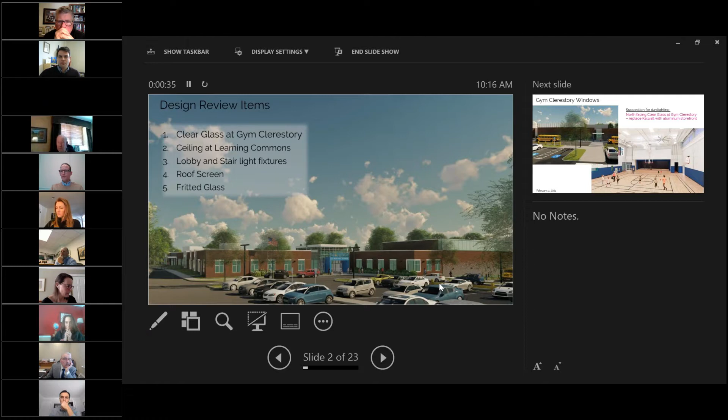Right, I hope I'm sharing the right screen. Did I press the right button, Dave? We see the presenter view for PowerPoint, so we see the actual slide and then the next slide with notes. Oh, okay, so you're seeing the wrong screen. If you can send that choice back to me again for presenting, I'll share the correct screen. Sure, hold on one second. I'm gonna click it off you first, and then I'm gonna click it back to you. Okay.

There you go, that should be correct now. Is it full screen now?

Decisions were made at our meeting last week, as Diane mentioned, and these 5 items were selected by the design review committee for us to push along in the process, get some pricing done, and give some additional design information. The first 4 items on this list were selected by the design review committee and are being further documented so that we can get pricing back. I think Dave's prepared to share a little preview of that information if we have it.

This is the images that we showed last week for the Gym clerestory windows, reminding everyone that the Kalwall designed for that area is very frosted looking, and it's a polycarbonate material that over time does get affected by UV light. So it's bright white, and it's intended to stay bright white, but if it's a 50-year building, it may not look as great later.

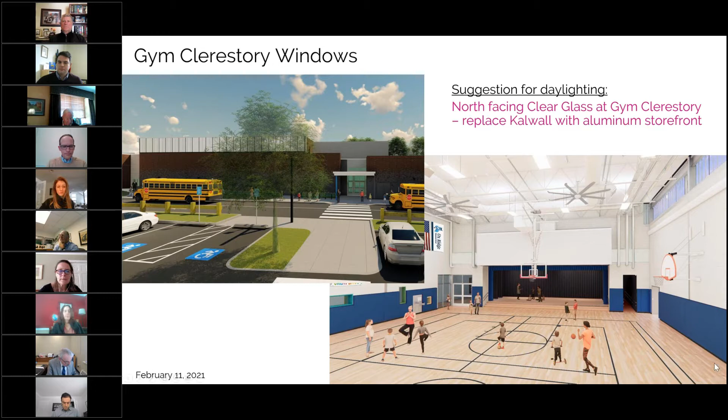The next item we looked at was a suggestion from the design team of adding some ceiling baffles to the learning commons. We have these baffles; they are an acoustic product for sound dampening, and they also have light fixtures on the underside of a few, not all of these baffles. We suggest that in the learning commons, as a design element, it would further distinguish the learning commons from the corridor by adding these ceiling baffles for both design and sound dampening. That was accepted by the design review committee and now will be priced after we send new reflected ceiling plans to the CM.

So we have some design work to replace these light fixtures, which were recessed in the ceiling, with the baffle design. We'll be looking at the light levels and making sure that's appropriate, which of these are lighted. I have another view of that that I added here, so you get an idea of what we'd be talking about.

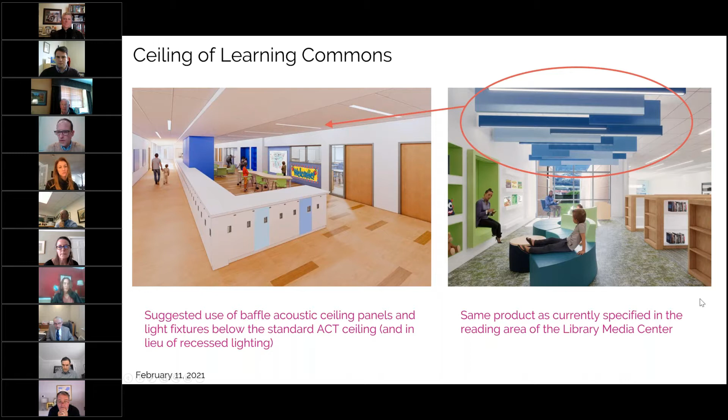Any questions? Amy, do you happen to know, or George, do those baffles require any sort of support system above, like a unistrut or anything? Are they for the most part mounted to the acoustic ceiling grid? I think they'd be mounted through the acoustic ceiling grid to the deck above, but they do not require separate unistrut.

Just thinking about it from a coordination standpoint, if we're taking recessed fixtures out of that area, my guess is we're probably in a similar situation if we go with those, unless George, you had something to add there. No, the only thing I'd add is maybe look into the fire alarm with the horns and speakers, because depending on how many you have, you might have an issue where you can't hear them.

Oh yes, so certainly the MEP engineers will take a look at that as well as sprinkler distribution. And as far as an order of magnitude, again, there are recessed fixtures that would be coming out, that would be offset.

So we don't have enough really at this point to know what this would be, and I'm not even sure of the quantity. I know the quantity we had in the estimate, which I believe represented only the media center. Right, and I think there was about 200 to 220 square feet of that material in the media center. That sounds about right.

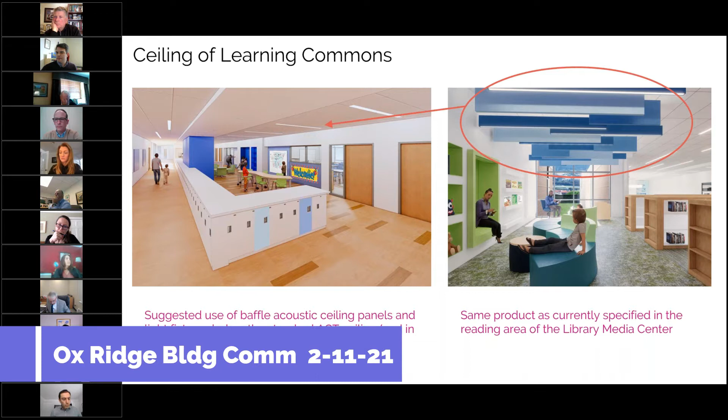This is Rusty, following up on Sean's comment - is there engineering to show us the incremental benefit of this versus the acoustical tile that we currently have?

This is additive to the acoustical tile, Rusty. I can get product data for you on the baffles to share the additional benefit, but this is just that - it's additive. The acoustic tile remains because there's still MEP systems, ductwork and piping that runs above the ceiling there, so we're not looking to expose that area.

No, I said the incremental value over the acoustical tile. So if you can get me that data, and Sean would probably be interested in it too, that'd be great. Sure, yeah, we'll do.

So I understand this too - is the idea today to understand and have some agreed upon action that this is something we are looking for the design team to move forward with, so that we can begin to coordinate their efforts with the planning and coordination work that's happening here on site?

Just my point of reference on something like this - obviously we're talking about swapping out fixtures, and I know at 9 o'clock this morning there was an actual coordination meeting where they're going through and reviewing the models and coordinating the building. So it's a matter of whether there is some likelihood of this proceeding, so we can let the rest of the team know that in these areas we should be flagging it in coordination, so we don't go past it, sign off on coordination, and realize we've got to go back to it.

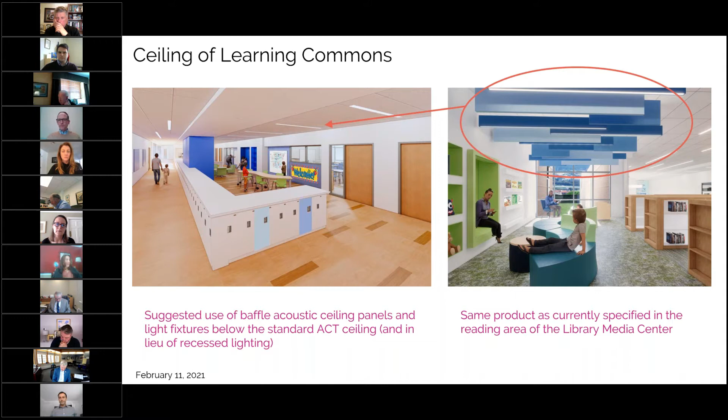Okay, I'm going to move on to the next topic we discussed, which is the lobby and stair light fixtures. Diane had asked us to review the design and whether we wanted to go back to some things we had taken out during value management. The design team did not recommend a change at the lobby - we're happy with the circular fixtures that are designed for there.

This is the exact product cut that came from the subs recently. It'll have a white ring. This comes in multiple colors - the product sheet they sent had this black version, but it will be as specified with the white, and it's a mix of 2 different sizes.

So we're not recommending a change in the lobby. In the stair, however, we are recommending a change to go back to this fixture, which is more linear in nature and reflective of the current design - the custom railings, the wall covering beyond, that type of thing. The circle would have matched or been more similar to the lobby fixture, but we certainly do appreciate the opportunity to go back to the more linear design elements if we could.

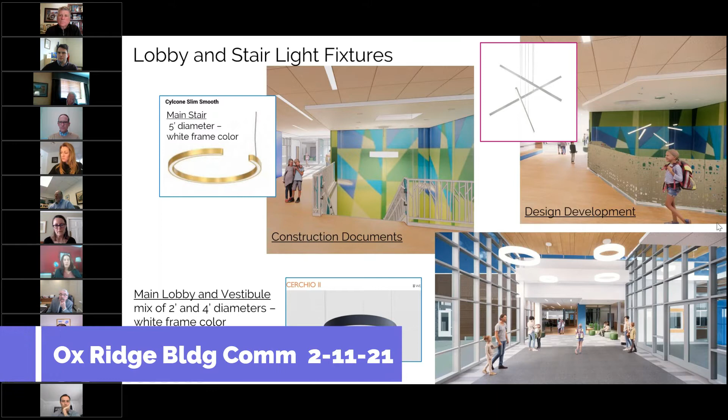So that's something we've asked the lighting rep for a fixture cost on, and unfortunately I didn't receive that yet before the meeting. I can check my emails after, because I heard it's coming in this morning, but it hadn't gotten here as of 9:55. So I'll check after our presentation and see if I can update the cost information on that.

It's a one-for-one simple replacement of fixture. While this linear one looks like multiple fixtures, it really comes to one junction box, just the same as this circular one will. So there's no change to the electrical - it's really just the fixture itself. Any questions on that?

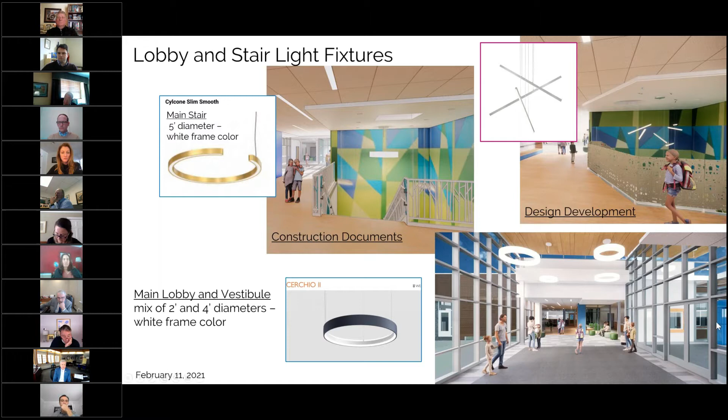Roof screens is another element that we took a look at as the design team. While we did a good job, I think, of reducing the amount of roof screens from 4-sided around every rooftop unit

Again, that didn't affect the neighbors, so that's why it was taken out as a part of value management. But given the opportunity, that's a recommendation of the design team.

Questions on that one? I think that's fairly obvious. Yeah, right. So moving on.

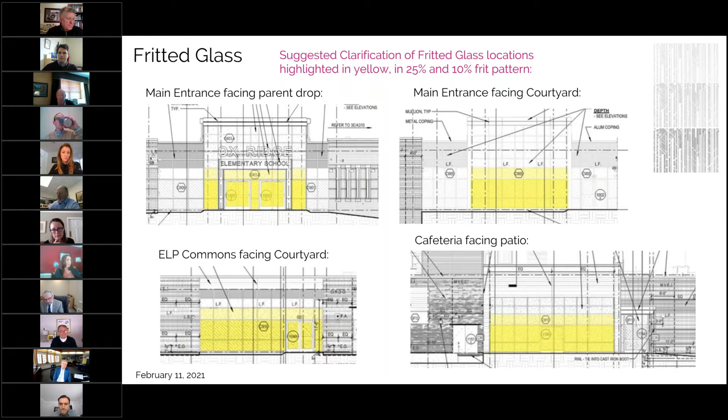On the right-hand side, we found an image. This is interior glazing, but we found an image that showed the same pattern that we've selected. It's also reflective of the indoor-outdoor environment that we were trying to capture in our design. And it also reflects the custom design on that main stair railing.

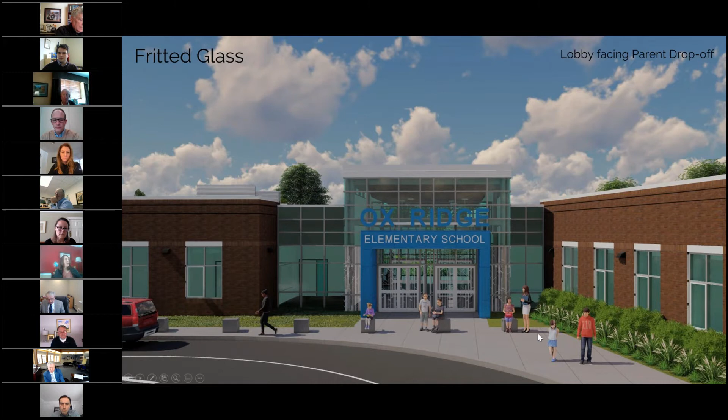So here's an image of the main entrance with the fritted glass shown. You'll notice that in all of the renderings, sometimes the fritted glass shows up very solid, sometimes it shows up much lighter, and it's dependent upon where the sun, or in this case, the light element that the rendering does, where that's coming from. So here you can really see the frit pattern on those lower panes of glass.

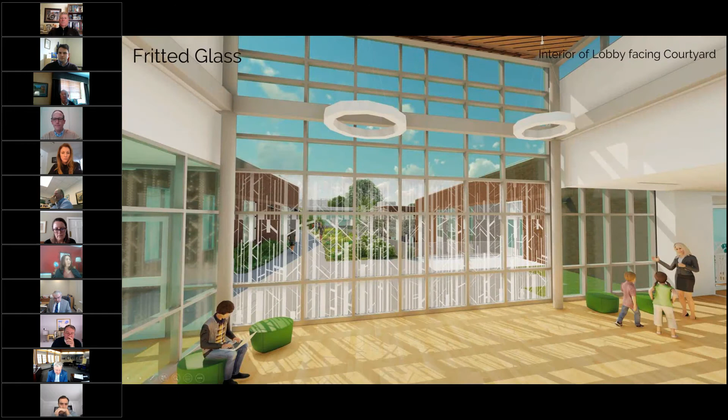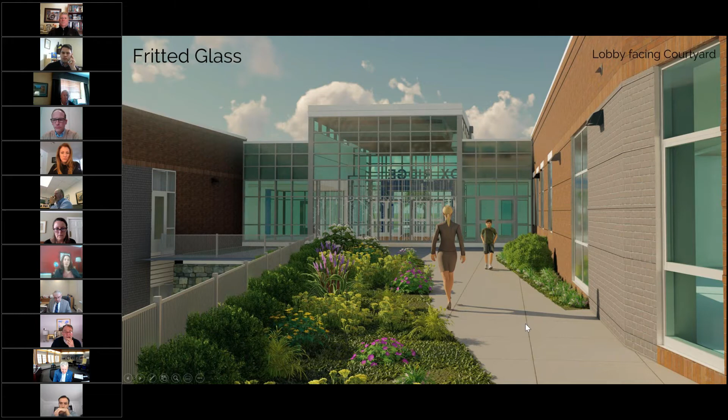Here's an image on the interior, and that really allows you to understand that you can see through this and see into the courtyard. Here's an image looking back at the building, and because the sunlight's coming from the other direction, you almost can't tell that there's a frit on here, but it's the same as what was in that last image.

Looking at the courtyard wall beyond, again, depending upon where the sun's coming from and what angle you're looking at, you can barely tell that there is a frit pattern applied here, but along the ELP Commons room, you can see the frit pattern by looking at this angle.

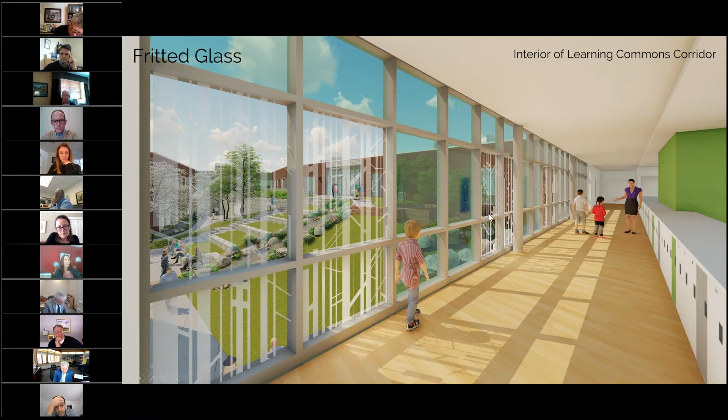Interior to those corridors, you can see that the design committee asked us to take a look at every other panel rather than every panel of glass. So what we've done is 2 with the frit pattern, 2 without, 2 with the frit pattern, 2 without, and so on through that entire corridor. That's the way it would be on both floors, on both wings of the academic building. This would allow for the shadows to be seen inside the building, but of course that will change throughout the day depending upon the angle of the sun.

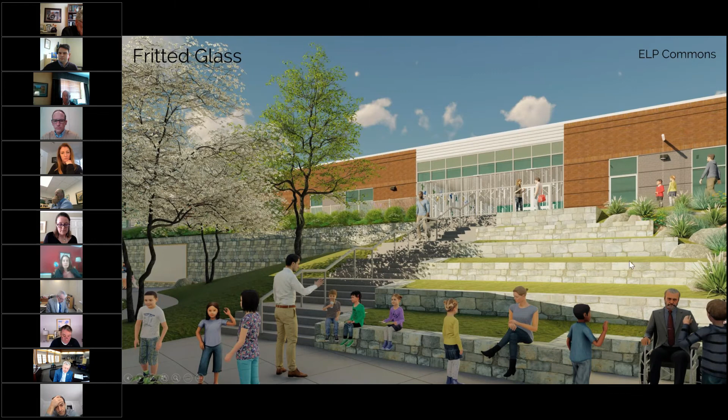Hey Amy, this is Sean. Quick question. Did the perimeter door coming outside the gym that goes into the parking lot, is that fritted or recommended to be fritted?

It is not. We actually did buy that in the alternate, but in our current thinking, which the design review committee asked us to regularize that pattern and reduce, we're reducing the amount. We're not recommending it at that entrance. There's a lot of doors there, as you know, and while the mullions of the glazing allow us to start and stop the pattern, the doors don't have a mullion halfway up.

This is Sean again. I was thinking of it more, you know, you got 25%, I think is what you recommended. And I'm wondering if it shouldn't be at the height of a child, maybe up to 6 feet or something like that, where it should be even a little denser, and not so much for light, but more for security. And if I were taking that approach, then I would reduce the percentages on the courtyard to maybe much less, so that the courtyard is visible on the inside, but the perimeter to the exterior has light passing through, but not so visible, so you can see through the glass to the kids on the inside.

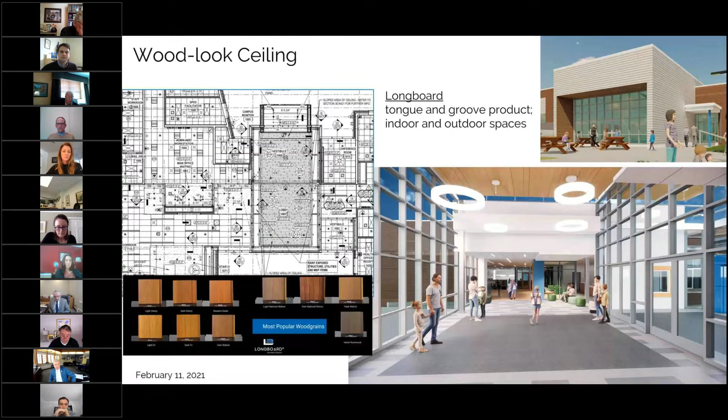Amy: Admittedly, I'm not a design person here, and I've got limited experience with that type of glass, other than some of the stuff you've shown us, which is helpful, actually.

I talked to Luke and Mike, and from a school point of view, I think we were landing on, honestly, let's cut back on this and potentially just leave it at the main entrance and the lobby area. Now seeing it, I'm wondering if it's even more of a distraction at the main entrance.

I think we would have maybe said keep it at the lobby and the main entrance is our recommendation, but I'm actually more worried that it's messier at the front entrance. I don't know if Luke feels the same, but that's just what I'm seeing and trying to interpret.

Originally it's like, okay, let's look at it. Upon reflection, I would cut it back, and I think there's consensus from the school point of view to consider cutting it back. I'm even more worried now about putting it in the lobby, looking at it again and changing my position.

This is Rusty. I agree with that stance. We're spending a lot of money to develop a beautiful courtyard, and I think there ought to be an unobstructed view of that courtyard. I wouldn't mind seeing it as the right design on the two entrances, but I would not recommend it for the interior viewing over the courtyard.

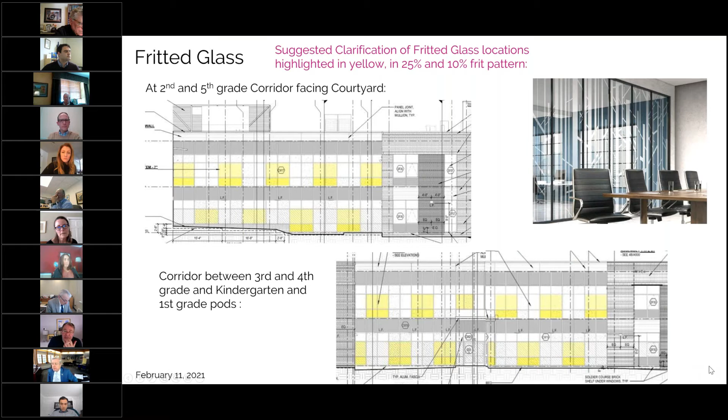Go ahead, Duke. Amy, could you go back to the main entrance? Sure. Thank you. So, and I'm sorry if I missed this somewhere along the way, the blue around the doors that says elementary school on it, what is that material? That's a metal panel, and that is 6 feet deep.

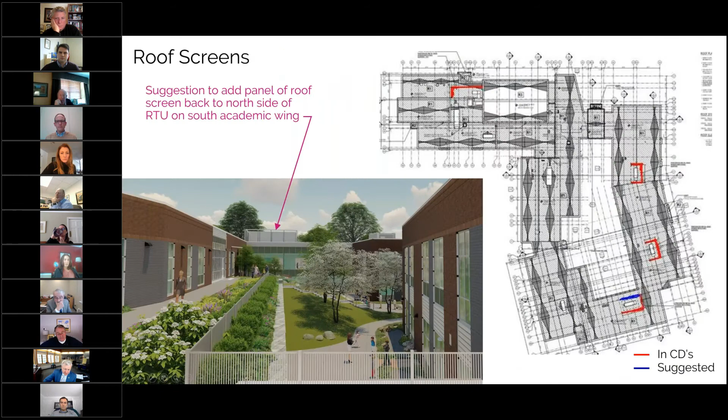It's really your portal—not technically a canopy because it's three-sided, but it's really weather protection around the doors. And that's a built-out element. I do have a rendering that shows that from the side. Hold on, here it is.

So you see it's 6 feet deep, and it's a solid metal panel. But if you go back to the larger version, and do more of a—I don't want to say colored glass—I just think even the fritting takes away from what pops in terms of the front door, the fact that it's an atrium. I think that's enough design element right there. The blue, the fact that it bumps out, that's an atrium.

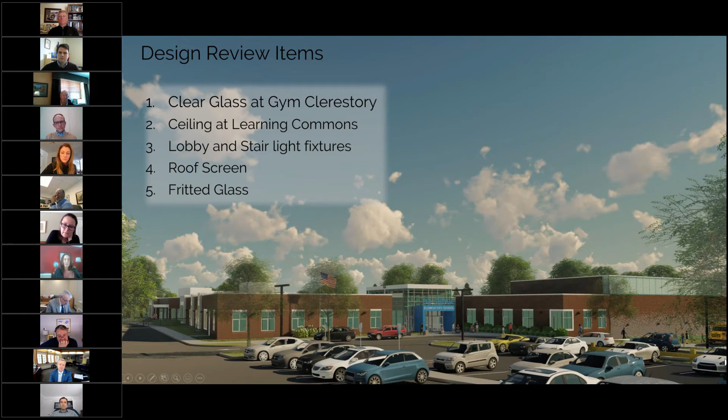This image on your screen does include the frit pattern, which is what I was trying to describe earlier. Depending upon time of day, the angle of the sun, and what angle you're looking at the building, here you can't even see it. I can, because I know it's there—I can read it a little bit in between some of the mullions. But when we go to the straight-on view, it just looks... in shade you really see it, and it takes away from the entrance, I think.

I'm fine with taking it out here. I totally agree, and I was only recommending it for the glass facing the courtyard if your intention is to continue to revisit it—not something permanent. I think that's a good idea, Amy. At the front, it's nearly too small to even have an effect in some ways. And I don't think you want anything to compromise looking out and seeing clear, no matter how casual or limited the visibility is.

I think Diane's option of just looking at the inside and making something an option there might be a good aesthetic thing, but beyond that—yeah, I think I'm willing to give, in the interest of everyone's time, because we're all so passionate about talking about this stuff, one more quick look in terms of Randy's point about carrying that design railing somewhere else in the building. But at the lower levels, where it almost looks like it's below a chair rail, I'd be willing to take a quick look at that, but that's about it.

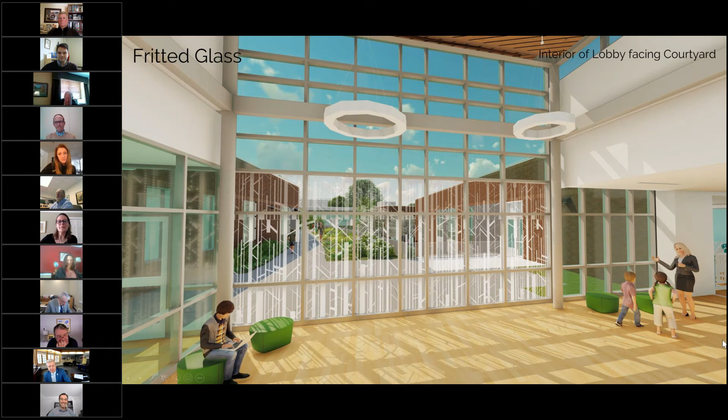That's all from me. Oh, all right. But should we wrap? Are there items that we can agree on now?

As in the gymnasium glazing, the lobby stair fixture, and the roof screen—should we give approval on those so we can proceed? So Amy can proceed with those items. I would say that's a good starting point. Does anybody have any discussion regarding adopting those?

We don't know what the prices are on the clear glass yet. We know it's approximate if we used—what do you call it, David? What kind of glass rather than storefront? Curtain wall, okay, which is more structural than storefront. So if it was a curtain wall, it'd be about a $17,000 added cost. I'm sure the lighting fixture is not much of an added cost, and the roof screen on the rooftop unit has to be there—it's just a mistake, we forgot it. So I'm proposing that we adopt those three right now, pending the final number on the clear glass, and move forward and accept those as changes that we will approve.

Any more discussion? I would move that. Yep.

Okay, is there a second to it? Yeah, Sean seconds it. Okay, all in favor, just raise your hand or say aye. Aye. Okay, we've got it passed.

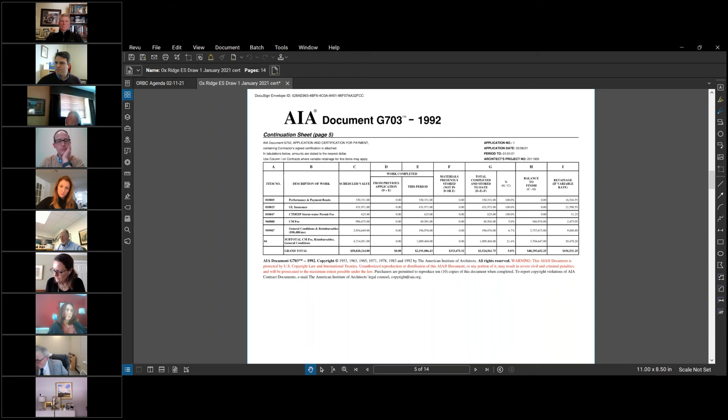George, is there anything you feel to add, or no? No, I think that was good, unless anybody else has a question.

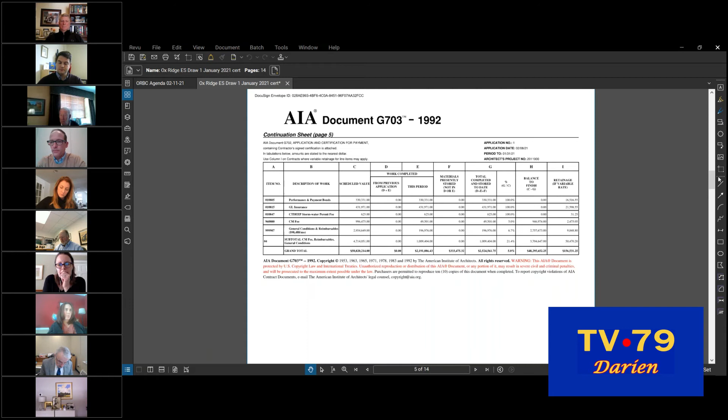Okay, are there any other questions? Because I'm going to next ask for a motion to approve the payment of the specific application in front of us for $2,368,030.50. That is, once I have the full signatures of the architect on the line.

Is there any discussion? Being none, I will take a motion to approve payment of this particular pay application, application number 1. This is Sean. Motion to approve.

Do I hear a second? No one wants to pay? Dan, second. Who is that? Dan. Dan, thank you. All in favor, raise your hand or say aye.

Aye. Aye. It appears you guys are going to get paid once I have that signature. Thank you very much for the explanation. We love what we do, but it's nice to get paid for it every once in a while.

So thanks. All right, and I'm going to hold you to your promise that you'll have these going forward a day or two in advance of our meeting so that people can look at them. Okay? Absolutely, and we appreciate you being flexible with this first one as we hone in on the process.